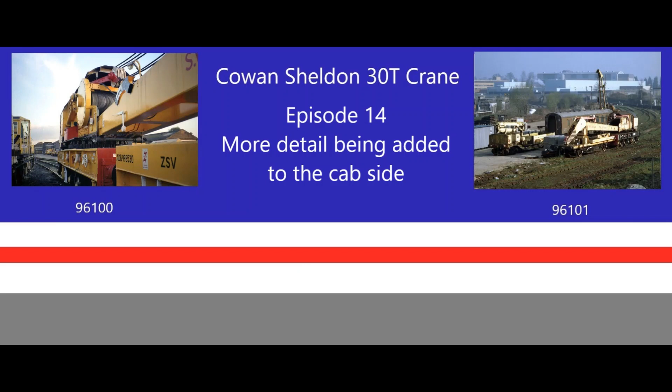In the last lesson we finished off drawing this crankshaft here, and in today's lesson what I'm looking to do is finish off some of the detail on the side here.

So looking back on the photos here, what I'm going to look to do first of all is this cutout here. Now behind that cutout there is a window, so the crane operator can look up at the mast while it's in operation, because this part of the roof does lift up. I'm not actually going to model the window or the interior here because the hole's going to be so small you're not going to see inside it.

And I've got a mate who's got one in OO, and he hasn't actually modelled inside the window. So we're just going to do the cutout because obviously you can see that, and then we'll look at adding some of the other detail that we've got on the side of the crane here.

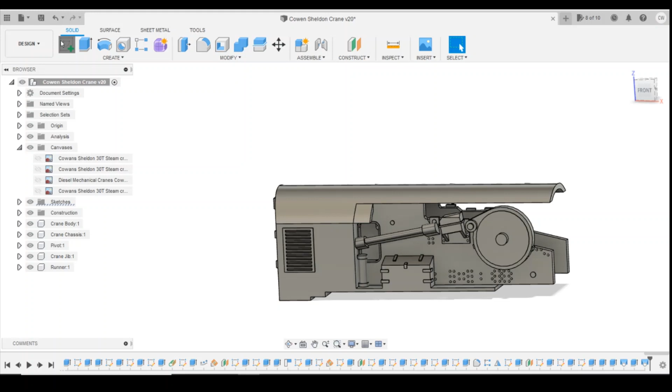Okay, so jumping back into Fusion, we're going to be drawing a sketch on this wall here. Now the position of the cutout looks like it's slightly in front of our window extension here. So we'll start it here.

Does it go to the roof? Yes, it does. So we'll coincidence that to the roof. Position it comes down slightly below the window, so about this sort of position, and then it comes back up. So we'll snap this up to the roof there, just define its position.

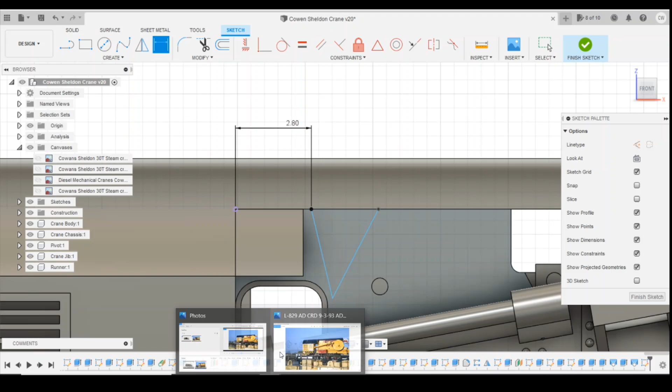Okay, let's have a look at the angles. So it needs to shallow. We need to shallow this angle out here a little bit. So it's 76, let's move that to say 60. That's probably too much, 65.

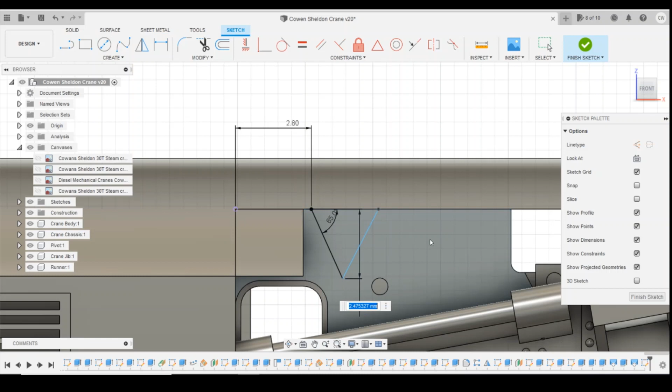Define the height from there to the bottom of the triangle there. I need to move that back down. And define this angle here. It looks a bit sharp, I think. Let's delete that and try again. So doing the angle, it's much steeper, so let's say 75. Yeah, I think that looks better.

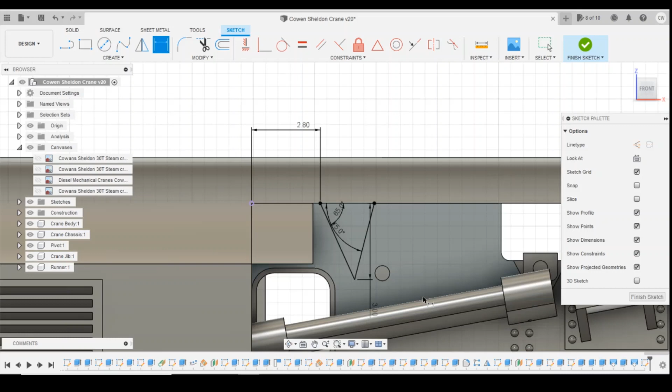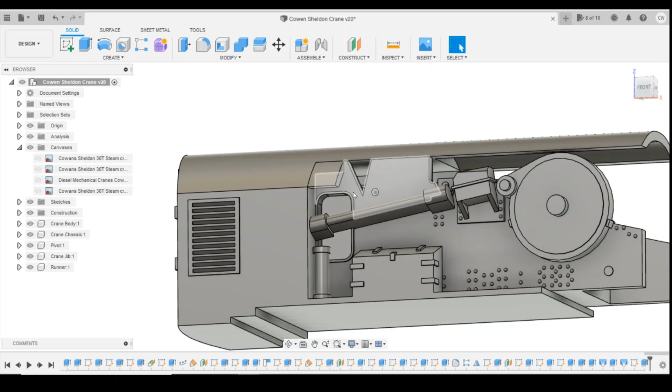Okay, and then we'll extrude this through to the inside wall here. Yeah, I think I'm pretty happy with that. You know, looking at a hole here that's probably no more than a couple of millimeters in size, you're not really going to see inside.

If you wanted to, you could draw the wall inside here just to represent that, fill that in a little bit, but I don't think it's going to be necessary, if I'm honest.

Okay, so looking at a bit more of the detail stuff here, these bits of rigging here, I really don't think they're going to be required on the print, because I don't think they would come out. They're so fine and fiddly that I don't think you would see the benefit of it.

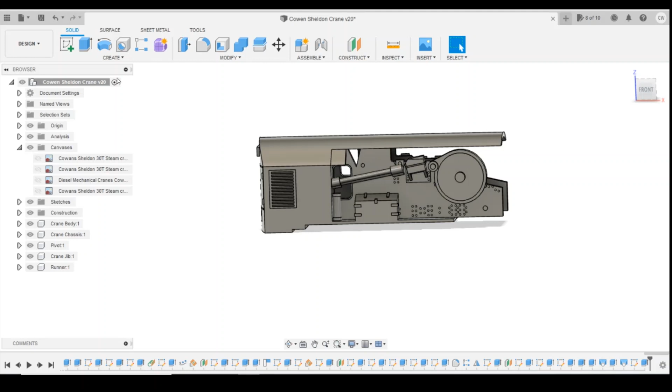What I do think we could do though is maybe do this cable one here. It will be small, but it's more just giving you a bit of relief that people would be able to see. So if we start with these first front two here, jump into Fusion, create a sketch on this face. Okay, so they're just, one starts just above the bearing, the other's off to the side.

So if we create a circle about this height here, 0.5 mm in diameter, define its position, 2 mm, and inside, let's go 3 mm.

Then we'll do another one, similar height, 0.5 diameter, define its position. One.

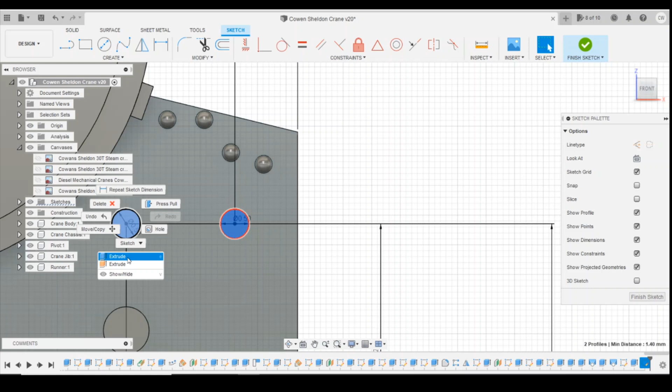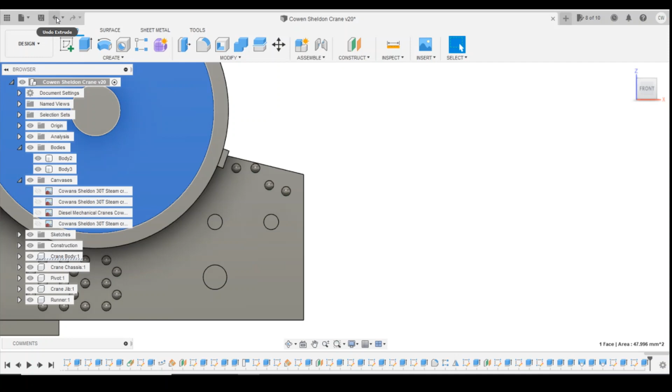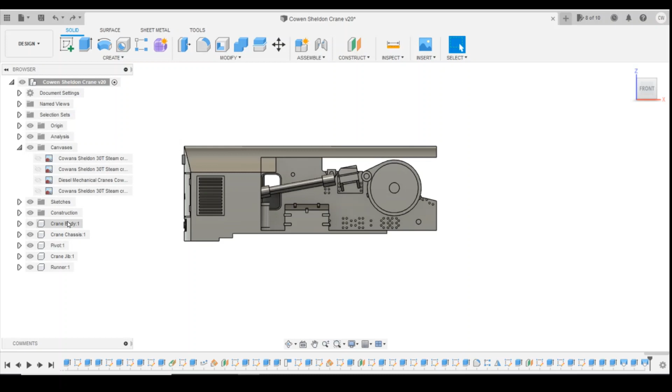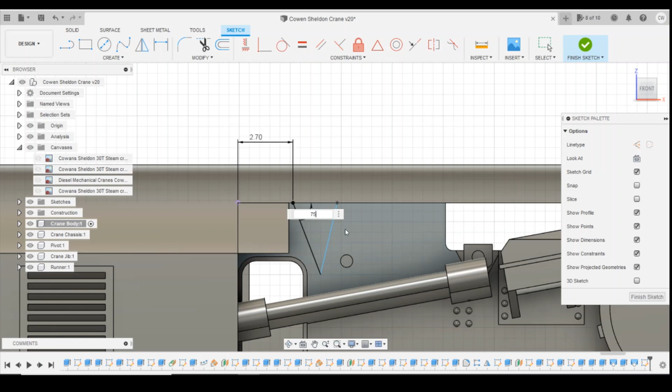I'm going to have to go back and do that window again, I think. Yep. Just undo all this lot. Okay, so back to square one. Draw that again, let's just do this quickly. Okay, so that's the window.

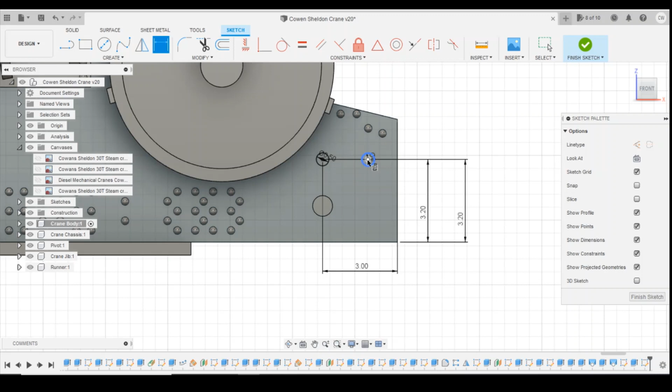Okay, so back to where we were, 0.3. Let's just check that's added into the bodies. So go back into the extrusion, edit the feature, and just change that to join.

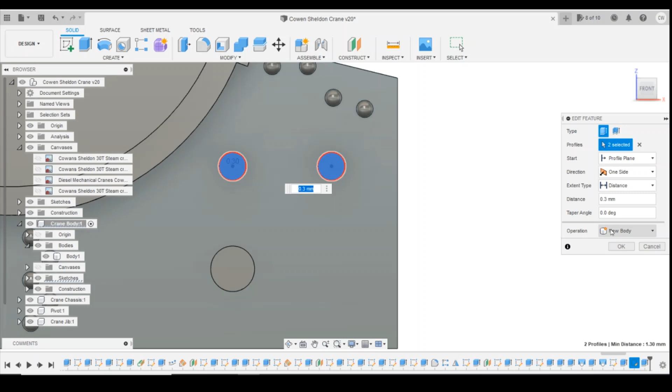Okay, so the next one looks like it's in line with just below the bearing here, so we'll draw that on. Sketch on that face again. Circle, so this sort of position here.

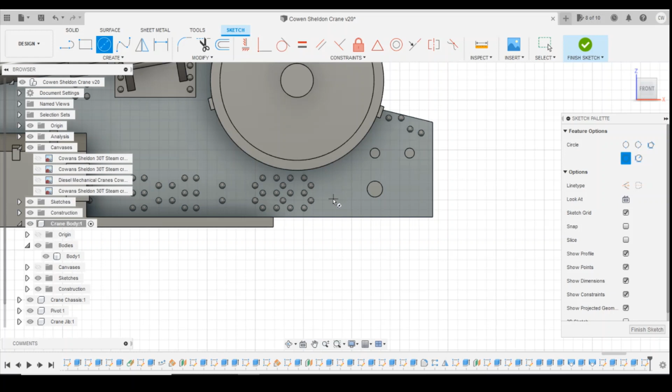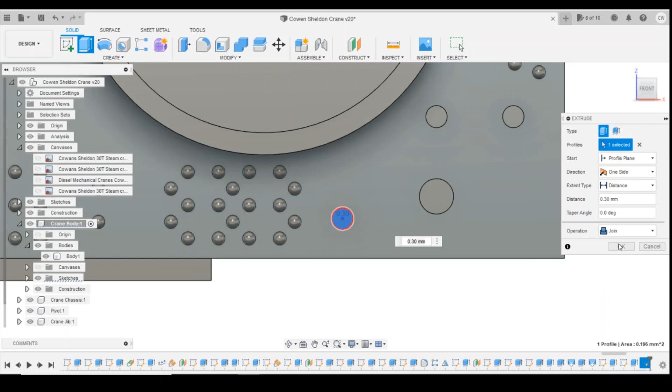Just extrude it to the same height as those short joints. A bit glitchy there, let's just roll this back again. Fixes it. Then the last one, same height as these two, in line with the end of the large flywheel here.

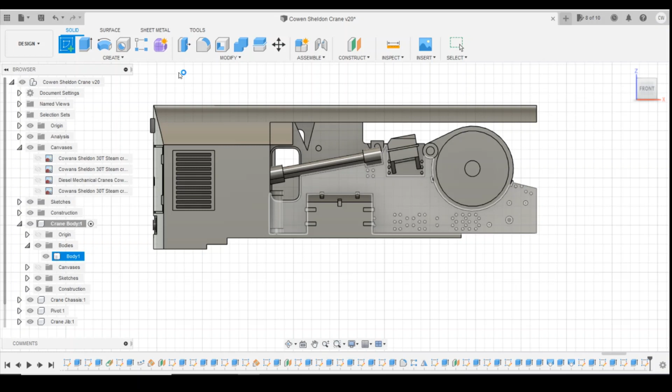Sketch. Find the center point. It's about that sort of position. Define that.

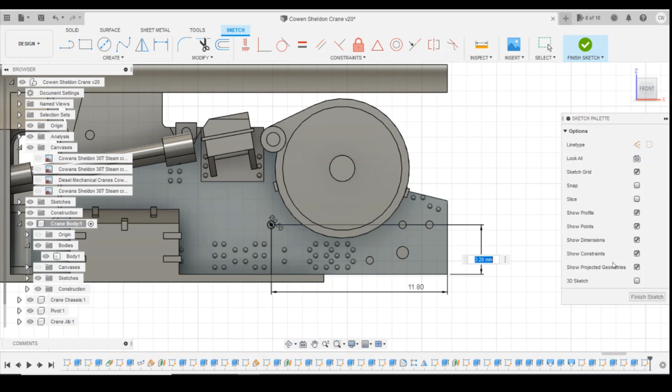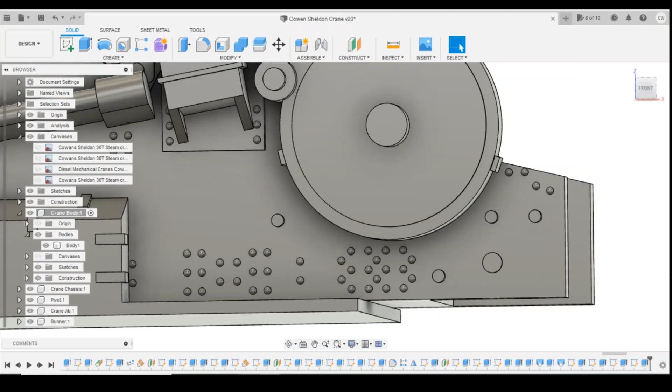Okay, so that's then done. So if we have a look, we're going to have to draw pipe work. So same as what we did last time, we created an offset plane from the face, and I think we'll just come out maybe 0.1 millimeter.

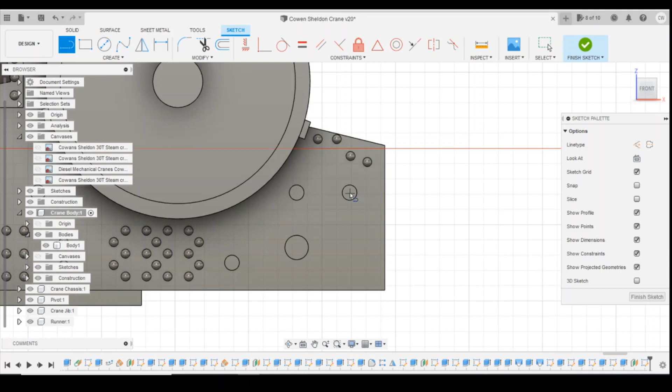Okay, and then let's draw on that plane, and literally going to draw in a pipe from there. Actually goes past that, doesn't it? To almost near where the toolbox is back here.

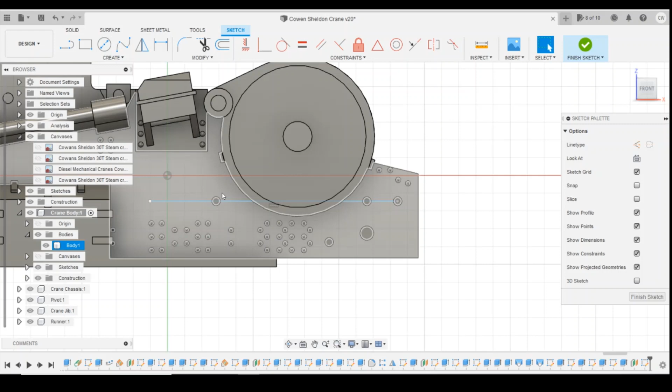So we can use the rivets to guide us, in line with the rivets. We'll do another line that goes upwards. Line goes from there to there. Okay, and what we can then do is pipe them.

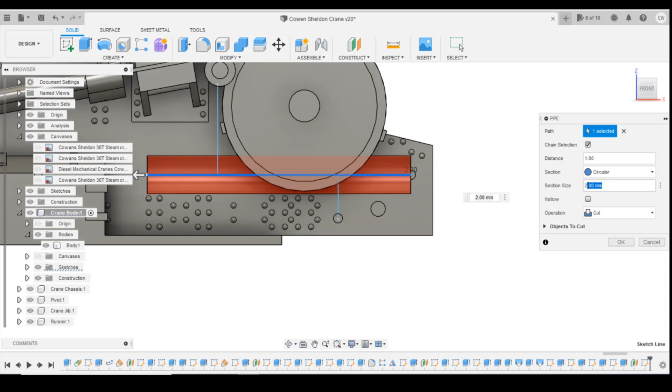So start with way too big circle circumference, so 0.2 I think. Let's join. Okay, let's get that sketch back.

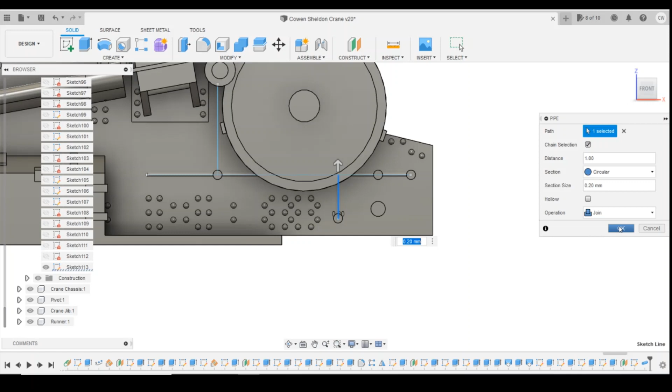Another pipe there, that's already selected 0.2. And then this on the last one. Turn the sketch off. Okay, so we've got all that pipe work there now.

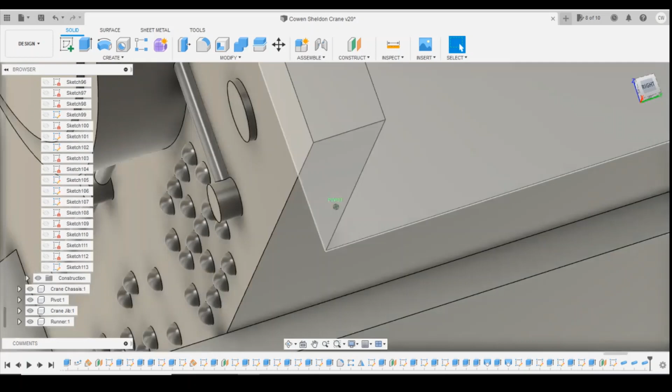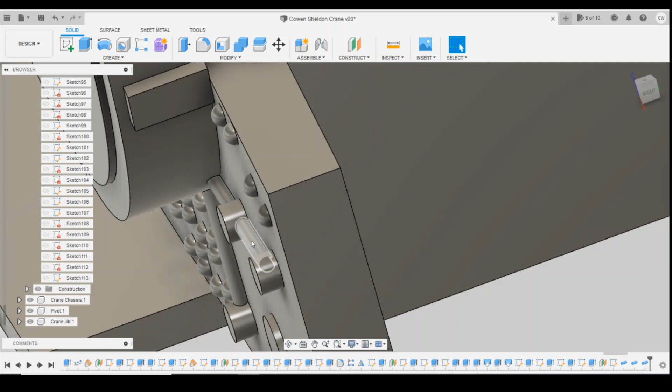Just looking at how far away from the wall it is, I might actually close this profile up slightly, just so there's a bit more meat touching the conduit to the side of the wall there.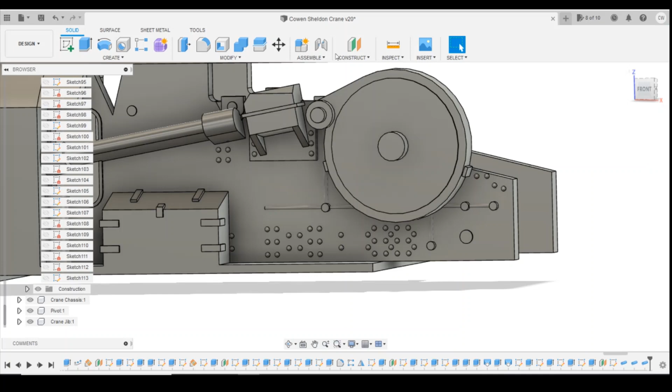Okay, so the last thing we really got for here is the horn that sits on the side here, so we'll cut an offset plane, use that face there—actually, use that face there, get rid of that, start again. So we're going to this face here, so I'm not planning to change that one. This might change, so we'll just bring that back. And that does sit slightly in front, so we'll click OK there.

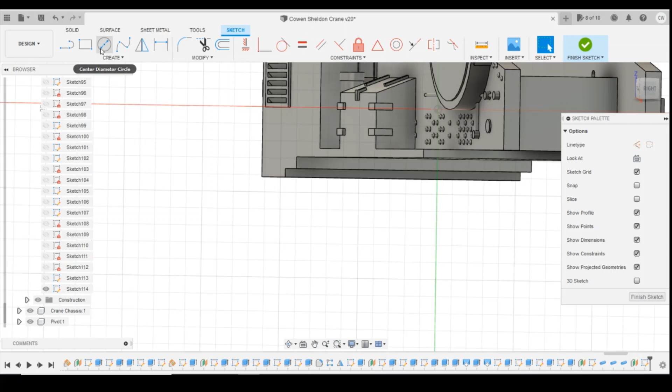Okay, so we've got that offset plane, create a sketch on that face. Rotate that back around a little bit. And the height, about here, that sort of position. It's up here.

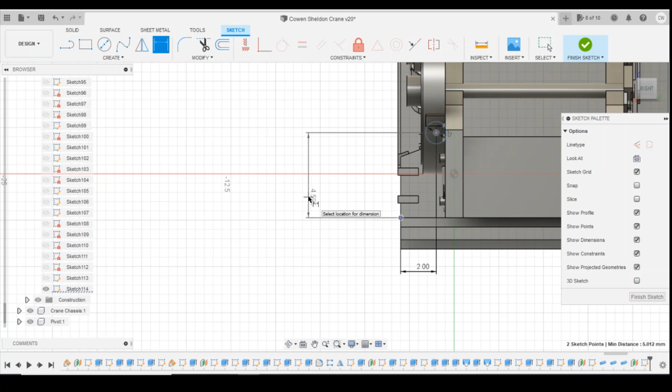So 1.2 millimeters, we know we're touching there. Define the height. That there. Six.

Profile. Tell it to extrude backwards. Join.

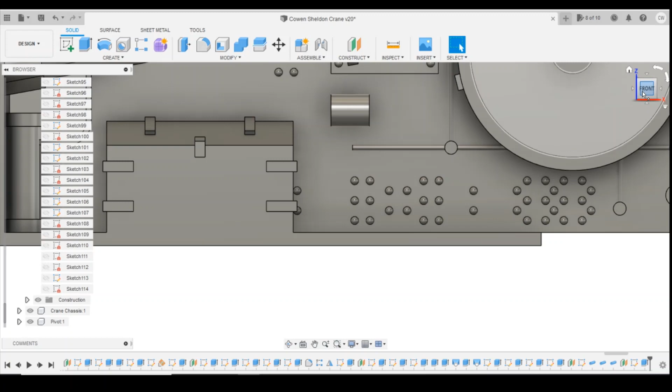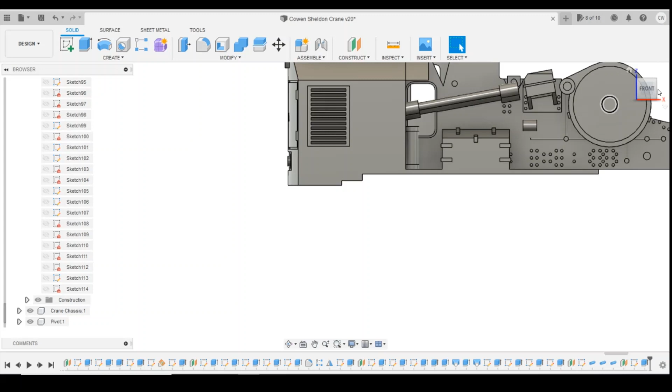Yeah, no, it's not—if you look at it, it's not the perfect of shapes, but we're looking at something that's, what do we say, 1.2 millimeters by 1.5 millimeters. It's tiny. You can sit there spending hours trying to make the shape look perfect, but ultimately when it comes off the printer, it isn't going to look as good as you'd expect. If you're going OO, maybe worth it. O gauge, definitely worth it, but in N gauge it's not really worth the effort, I don't think.

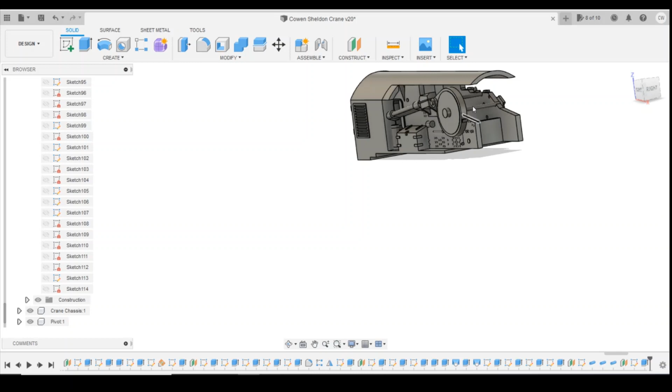Okay, so I think that we're there or thereabouts with the crane body. We've got some things to do inside here, but I think we'll leave them a bit more towards the end. We'll start working on some other parts of the crane now.